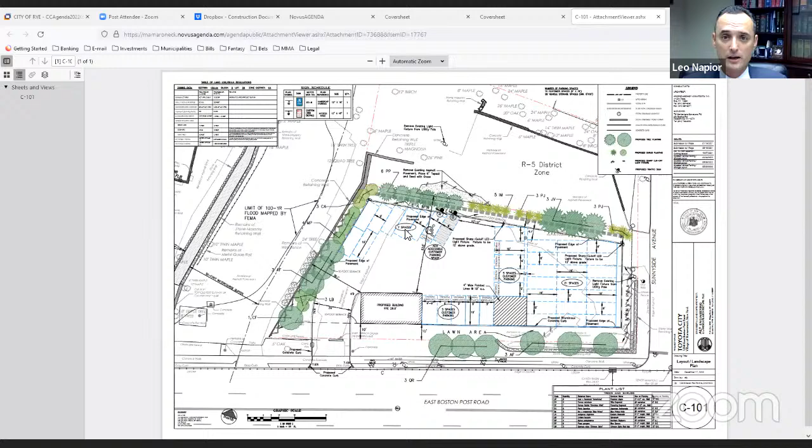Okay, I think that was it. Does anybody else have anything else you want to tell us before we turn it over to our consultants? No, I believe we've addressed all the consultant comments, but certainly if there's anything further, we have our team here.

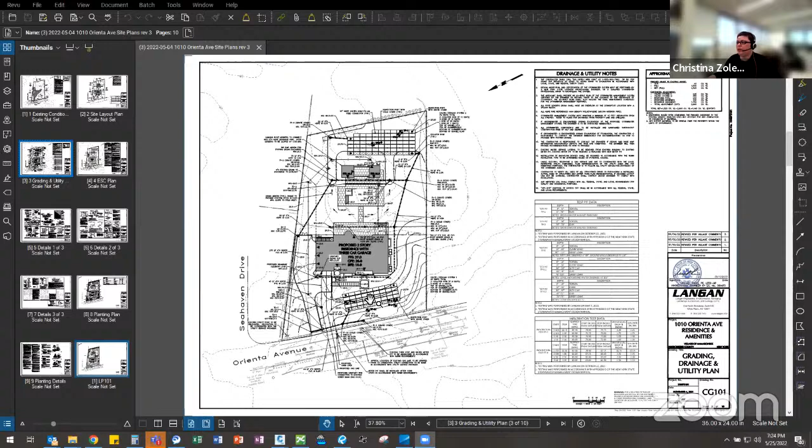Okay, so based on the comments at the last public hearing, we needed to go back out and redo testing because the test holes did not extend a minimum of 3 feet below to verify the depth of groundwater and rock. We went out and did an additional test pit in the back, and we had encountered rock just a little below the 3 feet. So we ended up raising the system just slightly to make sure that we had the separation of 3 feet to groundwater in the system in the back.

I believe it raised maybe a quarter of an inch, so we have the 3 feet of separation. When we went out and did the testing in the front, we encountered rock pretty shallow, so we ended up having to raise the entire system in the front to get the 3 feet of separation to the rock. In order to make sure there was adequate cover over the system, we ended up shifting it to the north towards the building to keep it away from the existing stone wall, since we did not want to impact any of the existing grading that was there.

So we generally have 3 feet of separation to groundwater and rock out there. We did not need to redo the infiltration testing since the depth at which both tests were previously performed are now at the bottom of the systems. So that was the only change to our design.

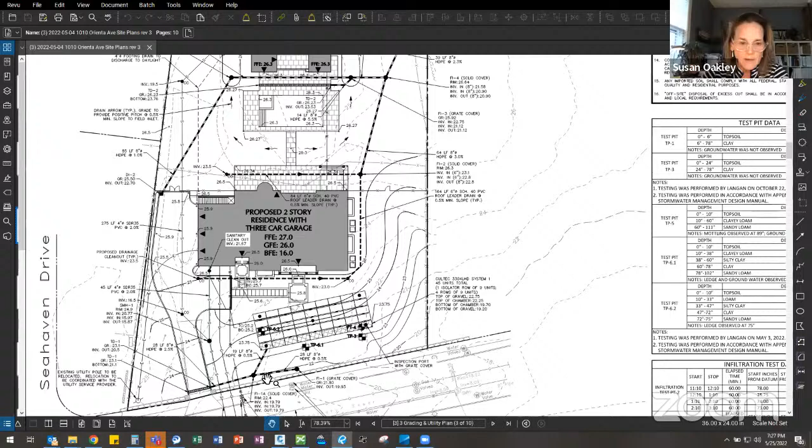It seems like another leg of drainage pipe adjacent to the stone wall. The angle of the drainage pipe has changed and there's a new leg, right where your cursor is. Yeah, so originally — and this will interfere with the plantings.

So, I mean, it shouldn't interfere with the plantings. We can slide the structure over slightly, but it was needed in order to be able to discharge into the system. We can shift the structure to the right if needed, so that way it doesn't impact the tree.

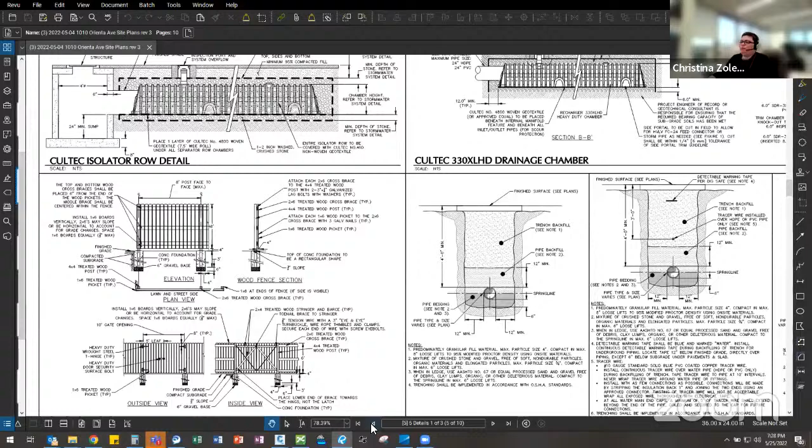How deep are those pipes going to be? I mean, they're roughly 2.5 feet, so there's generally about 2 feet of cover over the pipe.

If you go back to the landscape plan, you have shrubs that will be considerably sized, planted right on top of that. I'm not sure if that's the best solution. Well, we'll have to look at that because we have to collect the roof leader that's coming down and it has to get into the system.

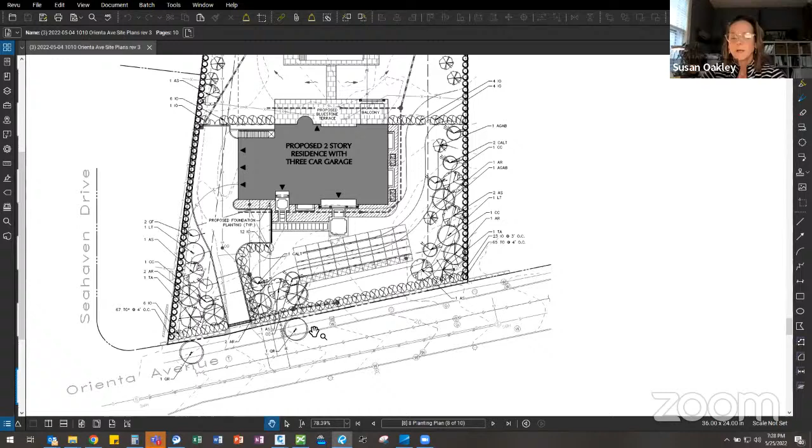So we'll take a look at the planting internally and see if we can make some amendments. Yeah, I think there's space to negotiate there. Okay, thank you, so we have that open issue.

I also noticed you moved the entire system in the front more towards the house. Yes, so it leaves more space in front of that. If we wanted to, is it possible then to spread out some of the trees so they're not so pushed together, and maybe try to fill in that space a little bit?

Sorry, I forgot to unmute, but this is Meredith at Langan. We can look at that. Yeah, I think per client requests, we were keeping the trees located — they want that kind of entrance. So we can take a look at it, but yeah.

All right, I don't know — that's just one person's opinion, and I was just asking a question. I'm not saying you should do it, but some of the comments that we received from the public last time were focused on the front there, because it had been, I guess, wooded before the trees were removed.

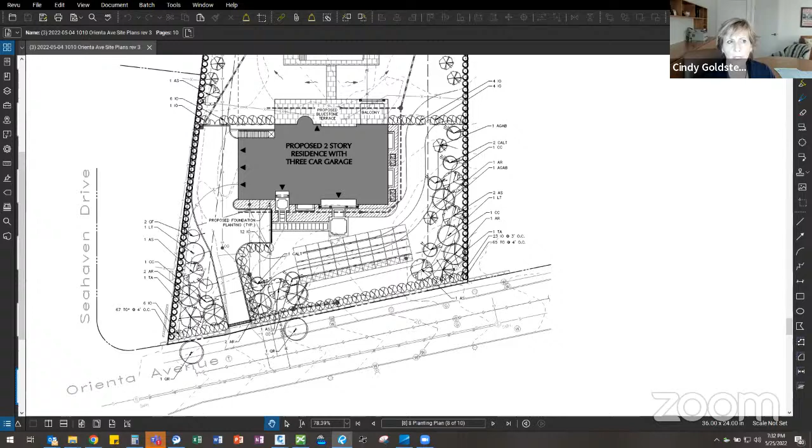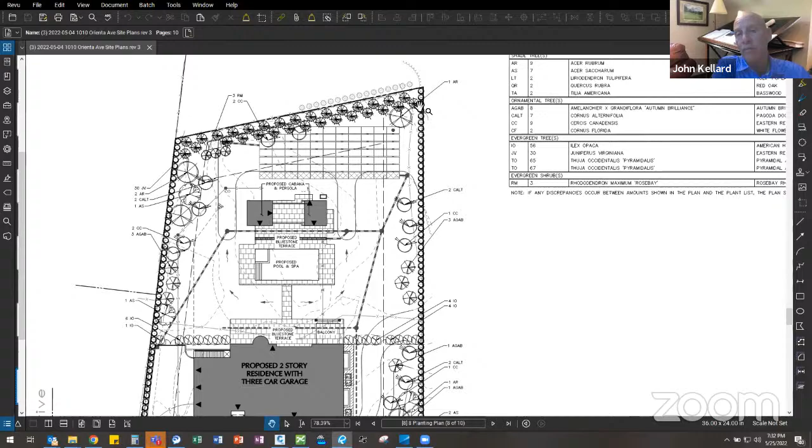The only discharge you'll see from the property up to the 100-year storm is what falls on the lawn area that isn't captured by the infiltrators. Most of the rear yard is collected, but anything beyond the drainage system will run off. The applicant has looked at what that runoff would be, and it's a fraction of what it is today, so their design significantly reduces runoff right through the 100-year storm.

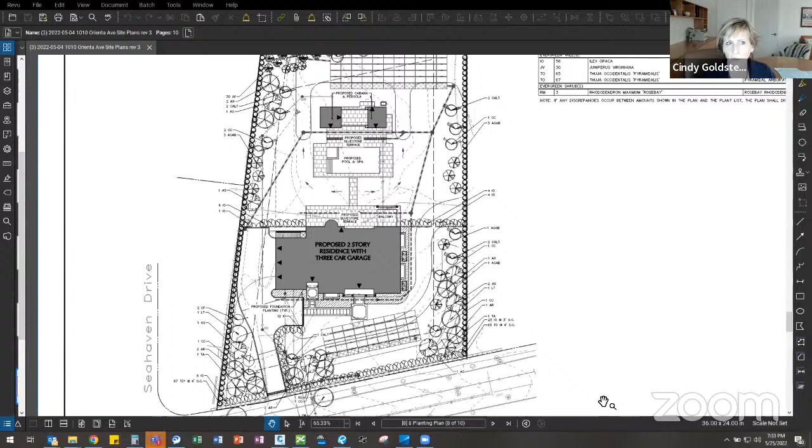Thank you. My other question: is there some way, through CAD design, to show street views of the property with the plantings outlined—what they look like when installed versus in 5 or 10 years? Is there a way to predict what the street view or neighbors would see once the property is fixed up according to this plan, estimating growth rates of the different plant species?

Is that a question for me? I'm not sure, probably not, John. You're off the hook on that one. I think it's for the landscape architects. Yeah.

There are ways to do that—it's not the miracle of CAD, unfortunately. It's a lot of us drawing it out or modeling it, so it's a bit of work. To show those perspectives involves taking a building model and a grading model and combining them with the existing grading. I won't bore everyone with the details, but it's possible, just not as easy as we'd all like.

The architect could do a rendering of that if they wanted. What we're talking about with the planting would fall under our purview as landscape architects, so yes, it is possible—it's just a little bit of work. More than a little, but it's possible.

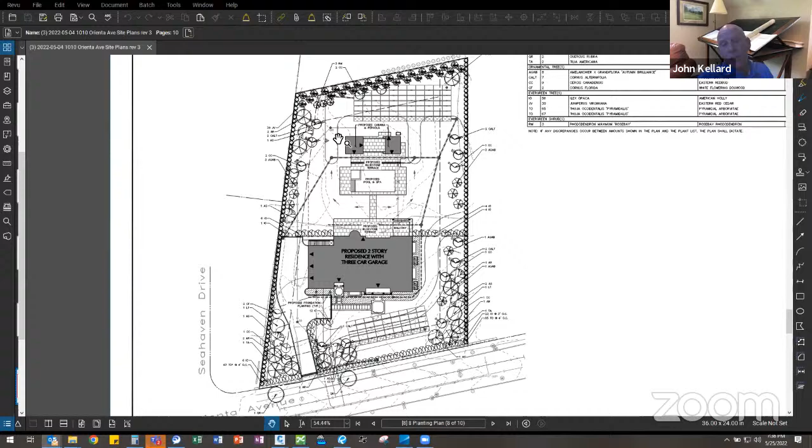Perhaps the engineer can talk about the elevation of the basement slab versus the mottling and groundwater levels they uncovered. The basement slab is at elevation 16.

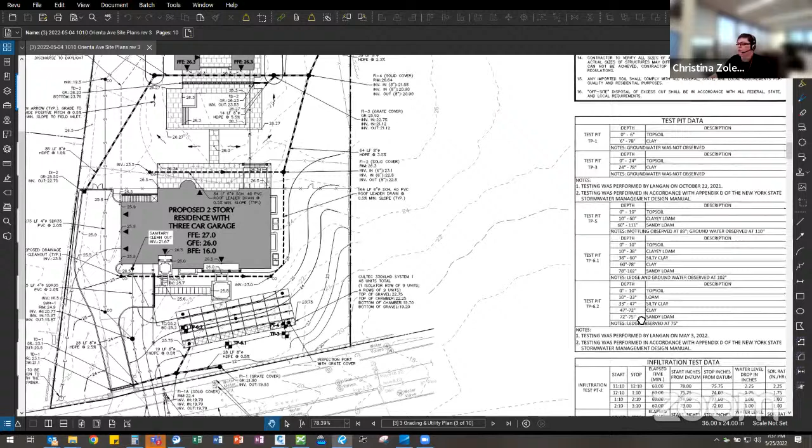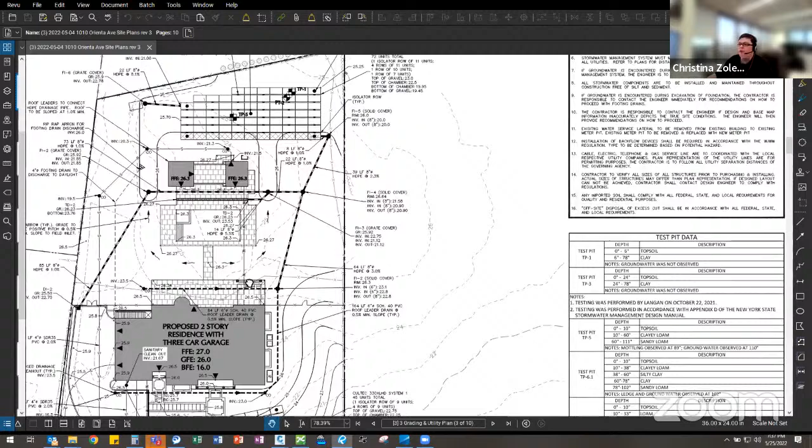We encountered rock roughly 6 feet down up in the front. That rock is shallow up here in the front, and then in the back we encountered groundwater roughly 9 feet below grade. We didn't encounter groundwater up in the front—it was mainly in the back. So groundwater is lower there because of the shallow rock up front.

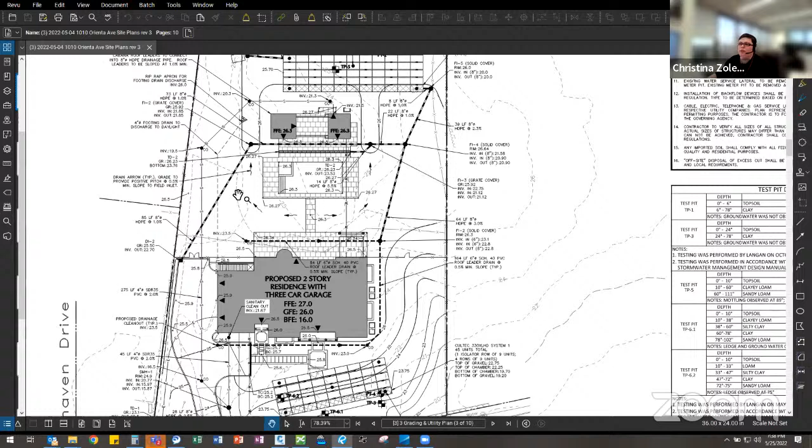So even though we're down at elevation 16, we don't anticipate a lot of groundwater to be picked up and discharged through the sump pumps for the footing drains.

That answer your question? Yeah, I mean, it was good extra information around it.

Is the sump pump discharge able to move any further away from neighbors' property? Is it now as far away as possible? The sump pump discharge location is here, back by the roof cabana, to allow it to sheet across the property. There is a grate inlet here that a portion of it will potentially go into, into our system. But we're locating it as far away as possible, I mean, initially it was up in this corner, so it was pretty close to the neighbors. I can do a dimension real quick and indicate how far away it is.

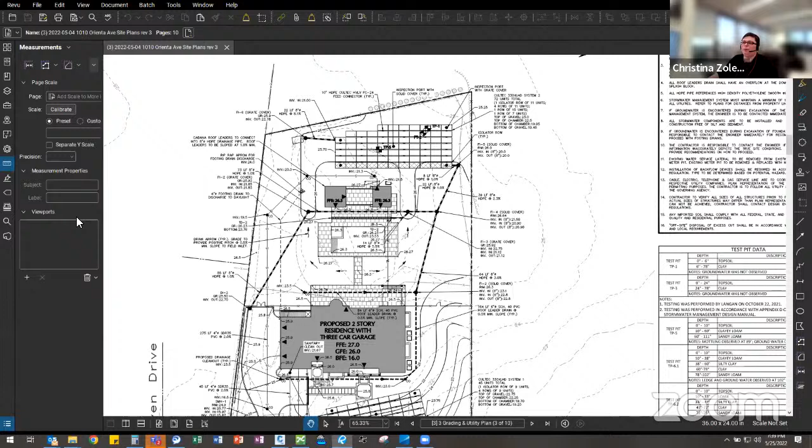Yeah, and I'm more looking for methodology. Did you just move it as far away as possible? Yeah, we moved it as far away as possible so that it wouldn't directly discharge onto the neighbors, any neighboring properties, and to allow it to sheet flow across the property instead of being a concentrated flow.

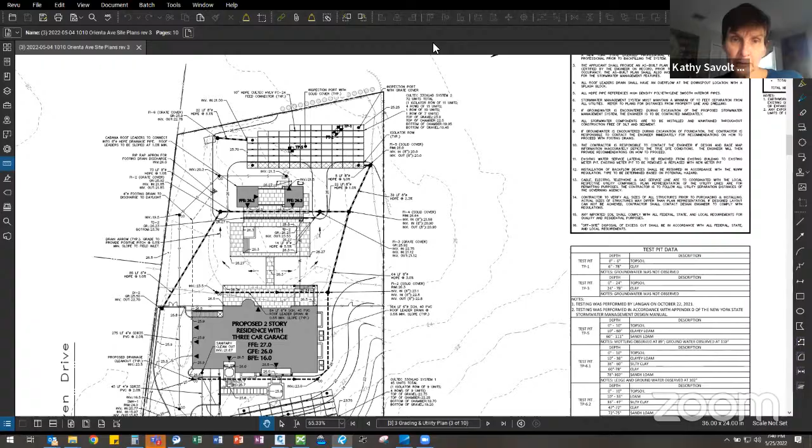Okay, thanks. Okay. Does that take care of everybody? We can get on to reopening the public hearing.

Charlie, I just need to call for a motion to reopen the public hearing? Yep, you can do a motion to reopen the public hearing. Okay, I need then a motion to reopen the public hearing. So moved. Second. Okay, in favor, Ellen? Yes. Seamus? Yes. Everybody keeps moving around on the screen. Richard? Yes. Cindy? Yes. And I vote yes.

Before going to the public, we did receive one email this afternoon with comments for the public hearing, which was sent to all of the planning board members, but not to the staff person filling in for Brittany. So that did not get posted on the website because the person didn't know it was there, and it didn't get sent to our consultants until I saw it, close to 6 o'clock this evening. We haven't had a chance to review it in detail. John, I sent it to you pretty late, I don't know if you had a chance to look at it. No, I saw the memo, but I didn't have a chance to look at it back into the application.

If we can address some of the issues tonight, we will, but we are certainly considering it, and it was received and considered. We also received an email right after the last public hearing from a neighbor, and then another email following up on that from another neighbor, basically supporting the comments in that first email. I just want to remind people, the planning board is not the entity that will pursue issues with the trees, other than to do what we can during the site plan review to replace them. We can't levy any penalty or fine or punishment whatsoever. So I know people were upset by it, but we're not the right people to address those comments to.